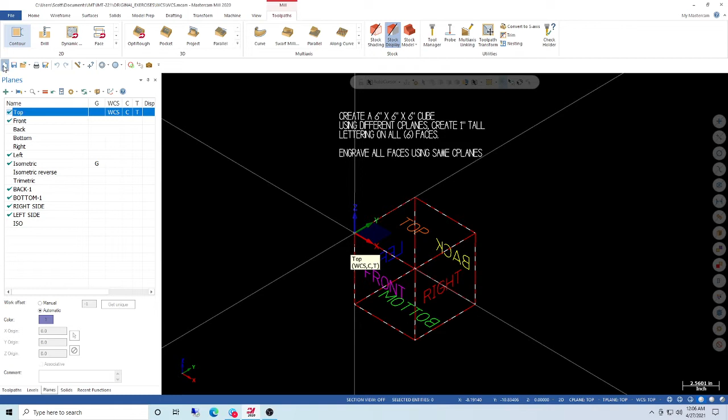Mastercam has a few basic planes. I'm going to go over here to the plane manager. And you can see, well, this is already a work in progress. So let me just blow out of this. I'm going to hit new. Okay, and see all the planes reset. So these are all the standard planes that come with a new file. You know, your top plane. Here, let me go to an isometric view.

There's really nothing to look at except the work coordinate system, where if I hit F9, that toggles the plane indicator on and off. When it's gray like this it's just the WCS, which is the work coordinate system. And we'll get a little bit into what the differences are.

But suffice it to say, planes are all the same, except they have different names because they're used differently. But they're still planes, and they still are handled the same way. It's just, depending on what purposes you're using them for, they're called something different.

So here's the basic plane: top, front, and you see the little gnomon changes when I click on the plane. Right now this is my active WCS, the little check mark here. There's my front, there's my back, there's my bottom, there's my right, there's my left.

You can really kind of tell from the Z, if I'm looking at it opposite of that arrow, that's what direction I'd be looking, downward, because when you're machining, typically Z is always up. So let me go back to isometric here, because we're still in top plane, even though I was showing you the gnomons for these other planes.

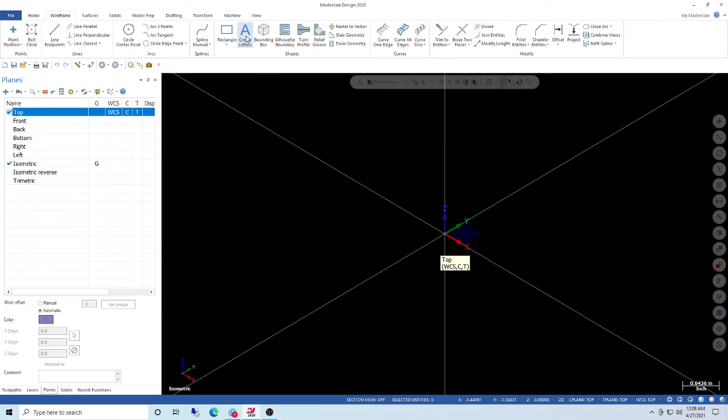Okay, so we have all our 6 planes, and you'll notice they are all centered on 0. They do not shift or anything, they all share a master 0. Alright, so let's create our cube. So I'll go up here to wireframe, create letters. Oops, not create letters. Sorry, scratch that.

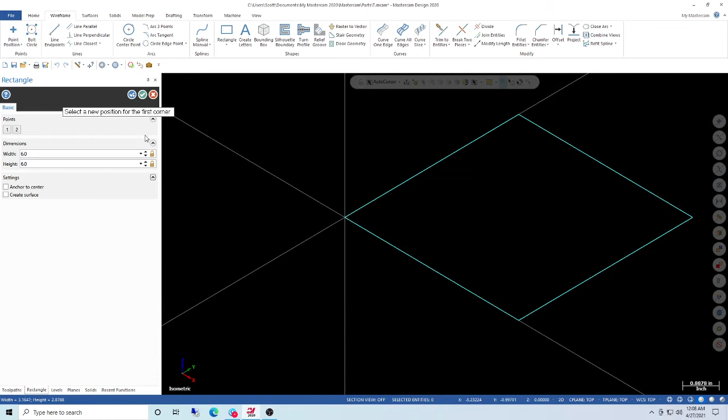Create a rectangle. I'm going to snap on the origin here. I'm going to draw about a 6x6 box. I don't have it exact there, so I'm just going to type it in these fields, the width and the height, however you want to call it. Say OK. So now I have a 6x6 rectangle in the top plane.

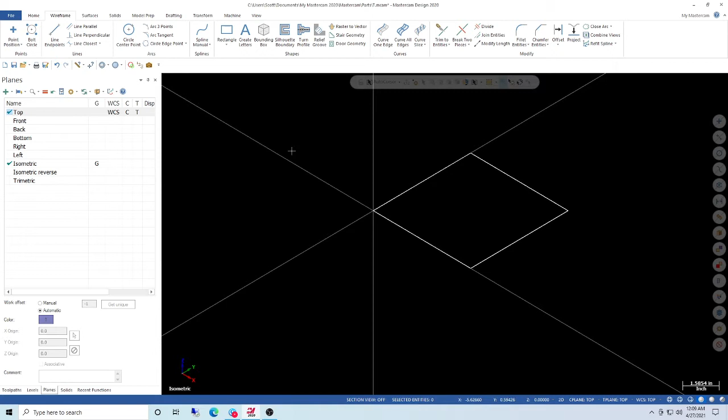Now I'm going to make this easy, and I'm going to copy this rectangle down 6 inches, and have it automatically connect by using the join feature. So I'm going to window around these to select them. I'm going to go up to transform, translate. Instead of saying copy, I'm going to say join, and that will join the vertices together. You'll see what I'm talking about in a second.

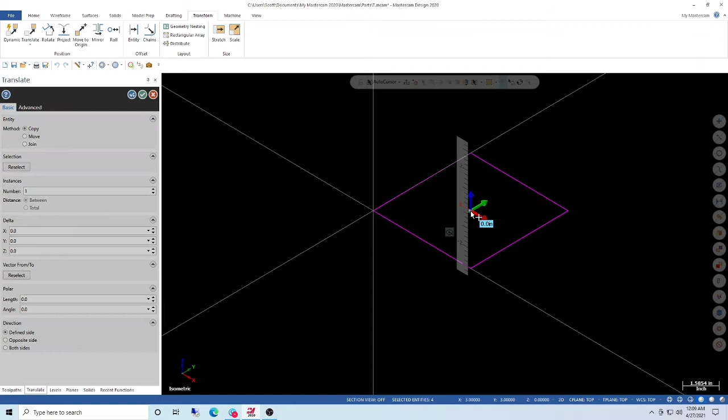I'll just do copy for now. And now you can either grab this little arrow here and do this, which is kind of a nice feature, or I can just key in -6 inches, and there you go. Now that's the copy. If I hit join, it joins the vertices for me. So that's the easy way to make a cube. I'm going to hit OK. I'm going to right click to clear out the result of that command. So now we have our cube.

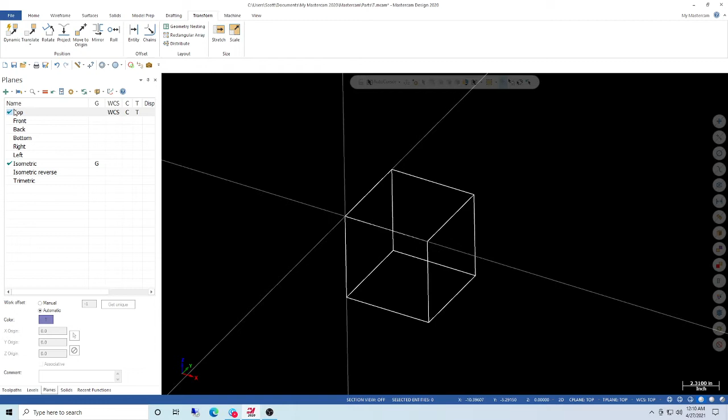So let's start with the lettering. We're going to work on the top plane. We've always been in the top plane; we haven't switched planes yet. So let's go back to wireframe. I'm only going to do the first 2, and then you are going to take over. I'm not going to do the whole exercise, but I'm going to do a third of it. Once you get the gist of it, the other sides should come easy.

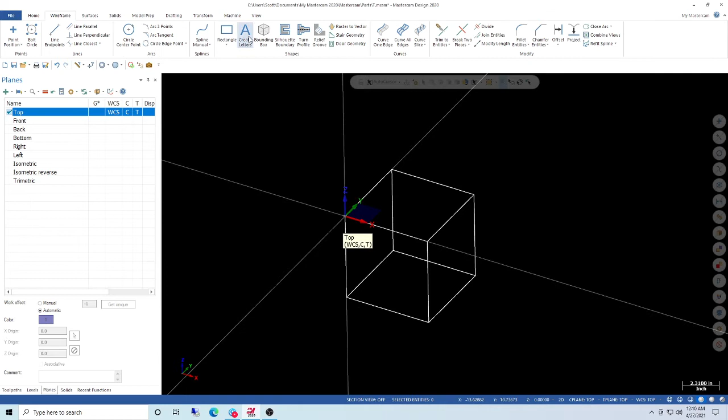So let's create our letters in the top plane. We're already in the top plane, so we're going to go wireframe, create letters. I like to use this Mastercam box font. If that's not selected, it really doesn't matter, but you don't want something like Gothic or something that's really fancy. Just use the Mastercam box font.

I'm going to change this to top. And you'll notice it just snaps wherever. I'm going to click over here, kind of out of the way. I'm going to hit OK to accept that. And before I do anything, I'm going to change its color just so these are differentiated. So I'm just going to make him orange.

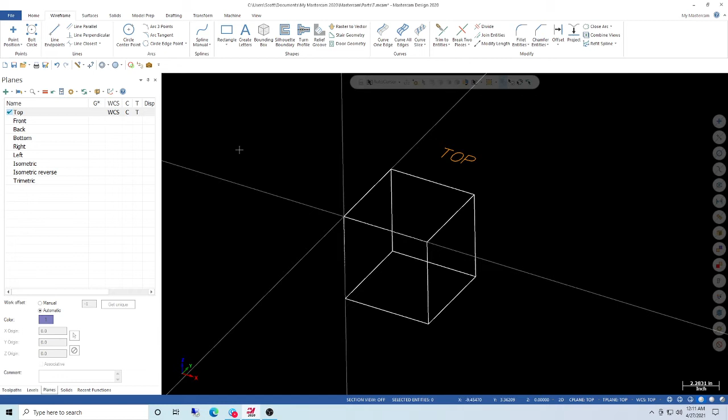Now, an easy way to get this guy in the center, I'm just going to create a line on a diagonal from there to there. All right, just a temporary construction line. So now I'm going to transform, dynamic.

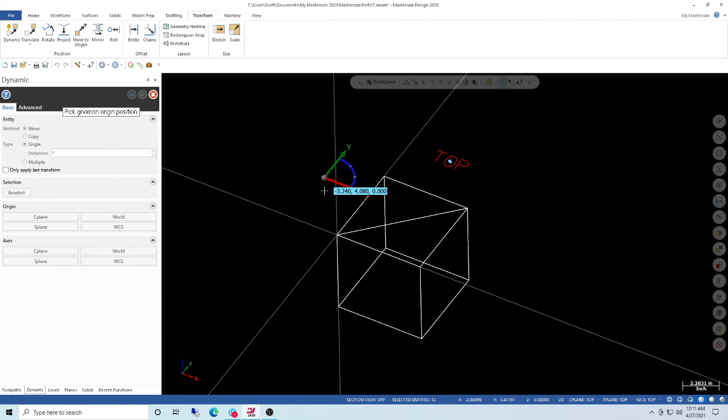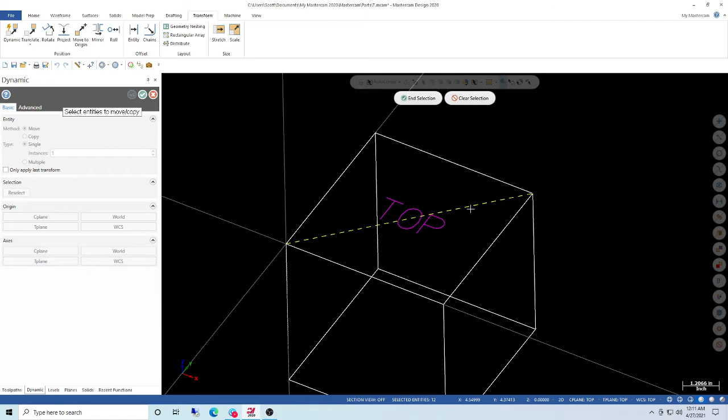I'm going to transform his center to the center of this, and you notice that when I grabbed this, it came up with a mean that's going to be probably split this way and this way. So if I grab the origin there, we go, snap it right to that line's midpoint. So I'm going to delete the line, right click, clear that out, and there we go, we have our top plane, our top engraving. Okay, now the bottom, a little trickier.

This was obviously our default plane. We're going to go down to the bottom plane. So I'm going to click on bottom. All right, I'm going to hit equal, but you notice that the 0 is up here. I don't want to draw my lettering, because if I draw now, it's going to be basically at the same level as this top plane. I want it down here. So I have to edit this plane.

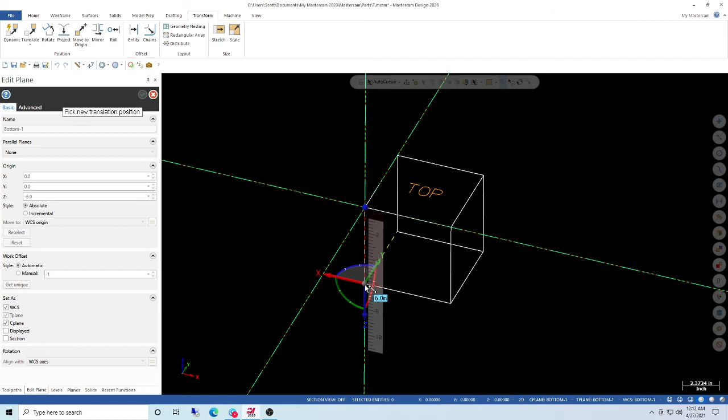All right, so I can right click on bottom. First I'm going to duplicate it. All right, and I'm going to set that plane as my active plane. And now I'm going to right click and edit that plane, and I'm going to grab this vertical gnomon here, the Z leg, and drag it down and snap to the bottom of that cube. And double click to accept it. And now Z is pointing down.

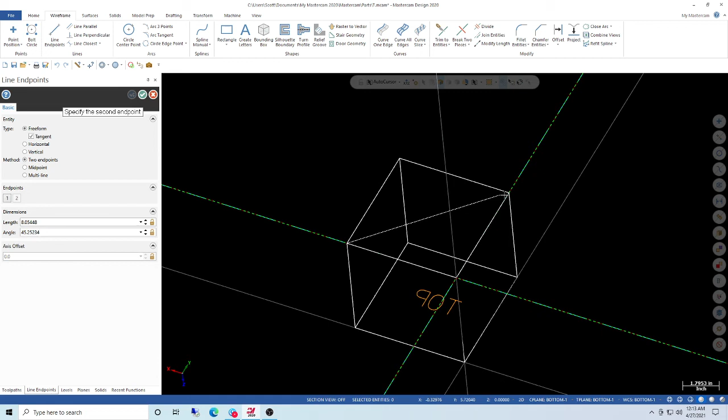I mean, I could draw like this, but it's much easier if I look at it normally. So I'm going to right click and say isometric view. And now I am looking at it in the proper perspective. So let's create our little construction line first. So we'll create our line. Okay, and let's go back to letters. And let's change this to bottom. And let's just sort of snap up here. Okay, let's change the color. Grab them. Right click. Let's change them to, I don't know, let's go green, I guess.

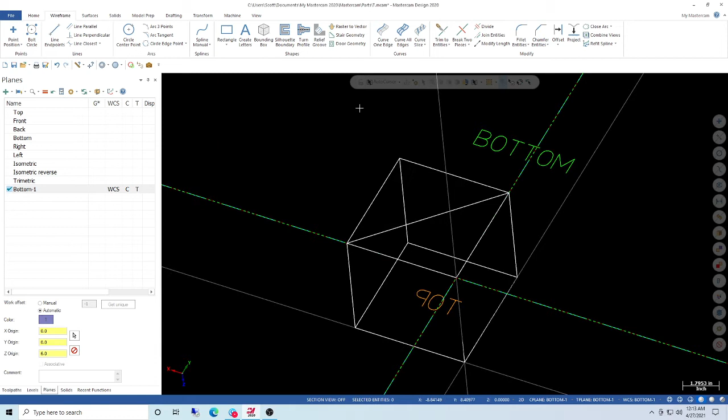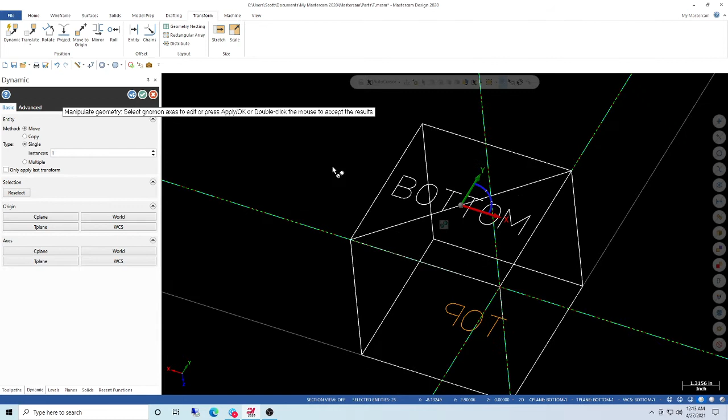Okay, so now we need to translate them to the midpoint of this. So let's just grab them, window around them, transform dynamic, snap to the center of the origin of the lettering it gives us, and then snap, drag it over to the midpoint of the line. Double click, and let's delete the line. And that's it for the top and the bottom.

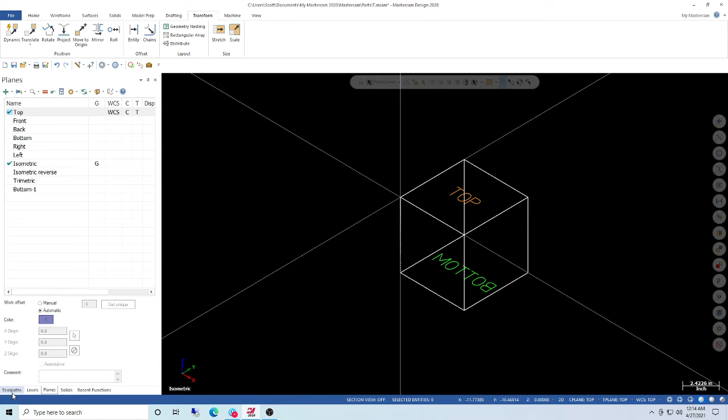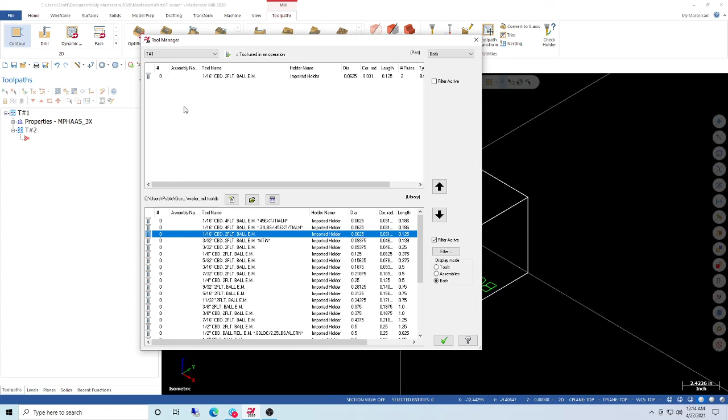So let's go back to the top. Just like to start from the top. And I'm going to do a quick engraving, and then you're going to do the rest. So let's go over to our toolpaths manager. Give us a machine. I'm going to grab a Haas mill. Whatever, I don't really care about the name right now. And let's go to our tool manager. Let's grab a 16th ball mill. Okay, I just happen to have it there because I had already picked, but if you didn't, you'd have to hit the filter and hit a ball mill.

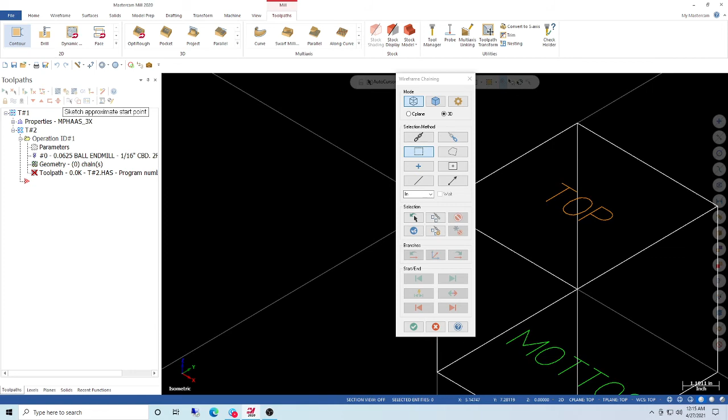Okay, and hit OK. So I'm just going to do a simple contour, and I'm going to use the window because I really don't want to pick these line by line. I'm going to window around. It's asking me for an approximate start point. I'm going to click there. Okay. And we want our ball mill. We want no cutter comp at all, so we want this off. Lead in and lead out, we want that off because we're just going to cut the center of these lines.

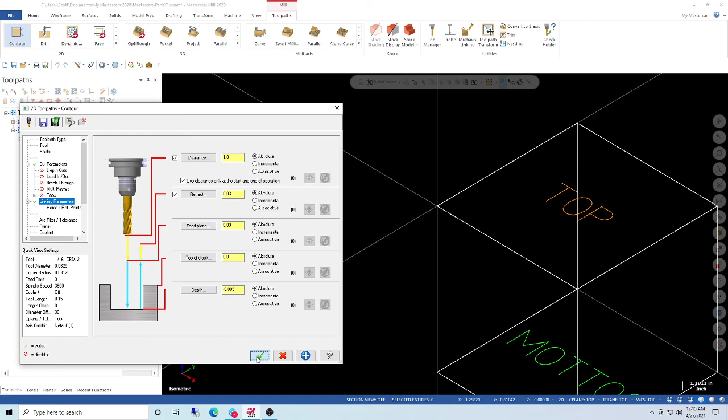And for the depth, let's go -5 thousandths. That'll work. Typical engraving. I'm going to set my retract to something low, like 30 thousandths, and make it the same for the feed plane. And then you only use this at the beginning. This way it'll stay down. And there we go. There's my engraving for the top. Now the easy way to do the bottom, here I might just rename this top, just so I know that that's what this operation is.

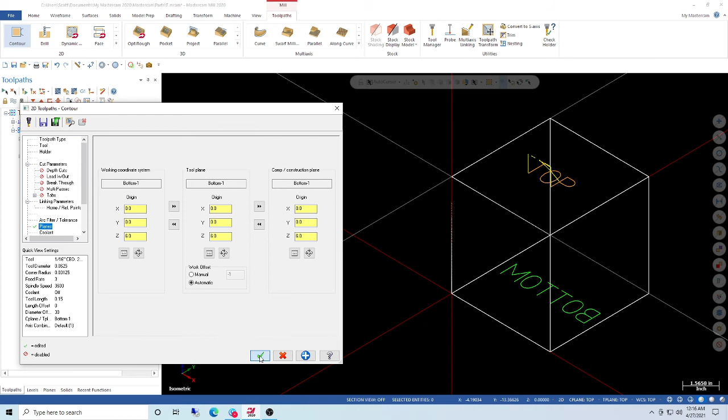Quick and dirty way to do the bottom is to just grab top and right drag him, say copy. Alright, I'm going to slow click, I'm going to change this to bottom while I'm at it. And I'm just going to change the plane and then grab the geometry. So I just go in here under parameters and go to planes and click bottom. Actually, we need the new bottom we made, bottom dash 1. Okay, so don't grab the other bottom, it'll be wrong. Okay, if you want to give it something more descriptive, like new bottom or something like that.

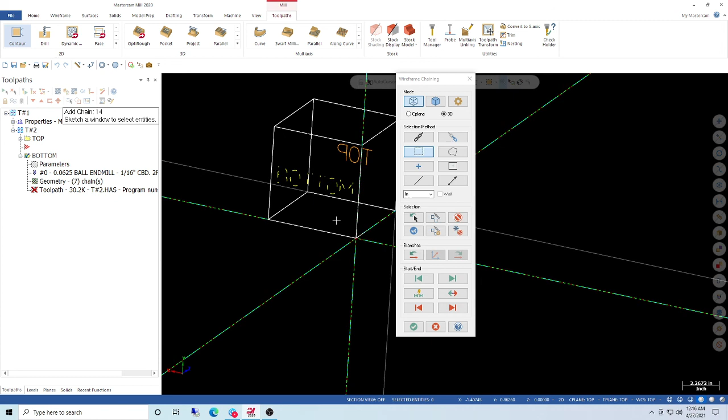Now, I'm going to just sort of swing around here, and I'm going to window around those. So I'm going to go to the geometry. Now this is all the chains from the top. I'm going to right click in here, go rechain all. And I'm going to do the same window. Trying to get the other stuff. And do that. So that was the approximate start point. Hit OK. And regenerate it. And that's it for that.

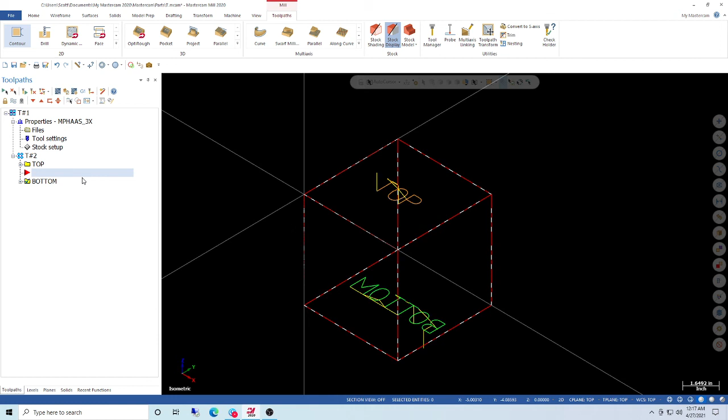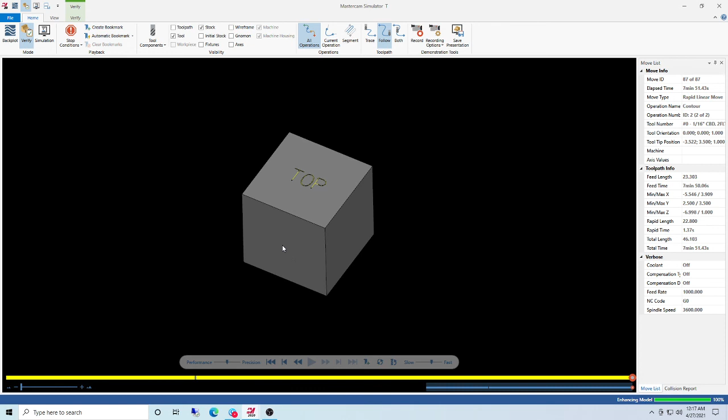Oop, I didn't grab the other op. So let's bail out of that quick. So both ops are picked. If I can just click the group, it'll grab both of them. Verify. And there you go, top and bottom. Alright. So you are to continue on and do the other 4 planes. Same procedure. Just obviously different planes.